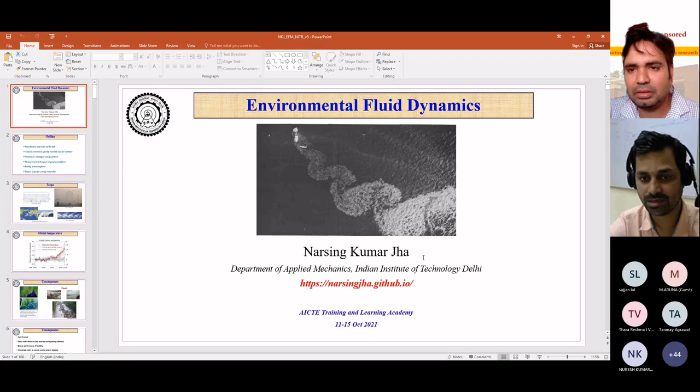Thank you, Professor Kishore, for the nice introduction, and thank you for the invitation to talk about environmental fluid dynamics in this AICTE ATAL Academy. Today I'll be talking about environmental fluid dynamics, and soon we'll see its scientific as well as practical relevance. I'm Narsing Kumar Jha, and as introduced by Professor Kishore, I'm at IIT Delhi.

The outline of my talk is as follows: first, introduction and the scope of today's talk. Then I'll move on to natural convection, gravity currents, and air currents associated with building flows. After that, I'll get into the details of ventilation strategies and guidelines, discussing the importance of ventilation in today's scenario. Then I'll briefly talk about different measurement techniques in geophysical flows, which will be advantageous for many participants to start working in this area.

Then I'll talk about another aspect of geophysical flow, mostly found in oceanic flows, which is bubbly turbulent flow. In between all this, I'll keep talking about future scope for young researchers like you. Please feel free to stop me wherever you have any questions regarding the presentation, the scope of work, or the measurement techniques. This is a very interactive talk, not a research seminar talk. So just stop me wherever you need clarification or have more thoughtful questions.

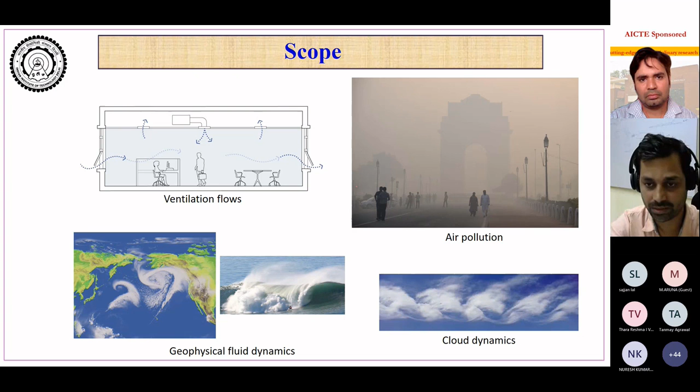And if it doesn't stop, then what happens? The first consequence is that if the temperature rises, glaciers will melt and low-lying lands will start to flood.

Near the coastal area, you will have less land available for occupation or vegetation. And whatever land is occupied, if water is over there, then all the civilization living over there will have to face consequences. And those consequences are very severe, and we don't realize how severe it can be till the time we face it.

So imagine somebody's house is flooded. Where does he go? For rich people, sometimes it's relatively easy, but if it's rural areas, then getting the resource out is not easy. Then what do you do? You live on the roof of your house. And it's not easy, flooded by rain, and the sun is not nice to you, and where do you get the food? The complete land is flooded.

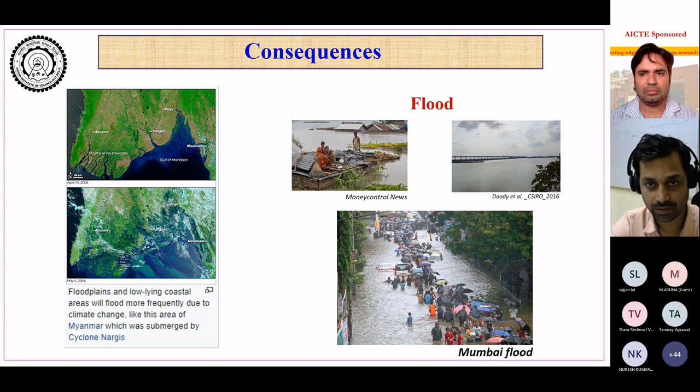Second, as temperature rises, what happens? If temperature rises, then you will have a cold crunch, because now you need cold. How do you create cold? You pay a bill for that, you pay energy price for that. And with energy price again comes the irreversible process of global warming and climate change.

So what is important? We need a policy to stop or minimize the soaring cooling energy demand. Every citizen of the country cannot afford to run their AC at 16 degrees centigrade, because you feel equally comfortable at 26, 27. Try running your AC at 26, 27 - it's very similar to what comfort you get at 16, apart from having a blanket. If it's summer, you don't need a blanket. You can run your AC at 27. And then policy is needed for that.

There has to be some intervention from the policy side. Some of these guidelines are suggested by the International Energy Agency from 2017, understanding some of these situations of world energy consumption in buildings, and seeing how it's rising continuously.

So first we need policy, but at the same time we need better energy efficient buildings. That's where a fluid dynamics researcher like us will play a role. We need to understand and optimize the energy performance of the building.

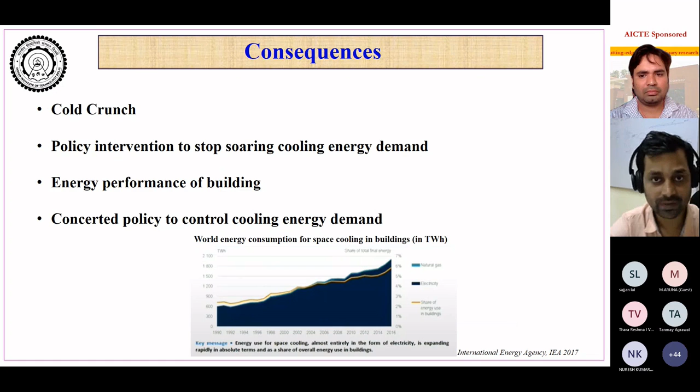And another big problem apart from climate change is air pollution. So that is the next area where I see that one day a Nobel Prize will be awarded. And a country like India, which is facing a huge problem with air pollution, has large scope to work in this area.

So that's the positive consequence. Now let's see how much energy we invest in buildings compared to transportation and industry. If we see metric tons of carbon released from different sectors, transportation is almost half that of buildings, and industry is half that of transportation.

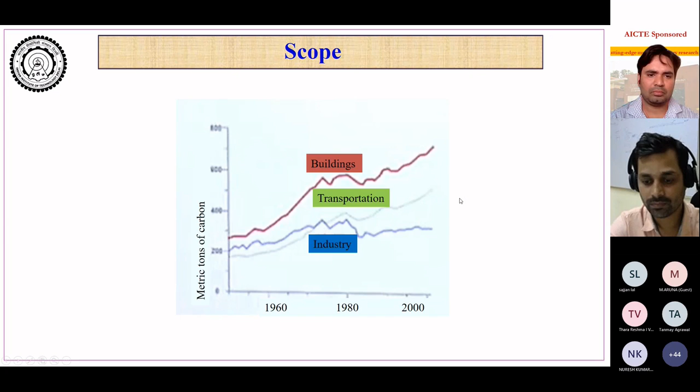So a lot of energy is spent, or a lot of carbon is being emitted from here. We need to take care of this, understand it, and optimize it, as I was telling earlier. So now, how do we optimize this? How do we reduce this carbon? Where does the energy come from?

We have to use readily available sources rather than depending on fossil fuels like coal and all. I'd like to remind participants that it took a billion years to create these fossil fuels, and we, the human civilization, have almost emptied it in less than 300 years. With an optimistic evaluation, in the next 75 years we'll run out of fossil fuel. So we need to depend on other sources of energy which are readily available to all of us without any disparity by the system or nature.

One obviously is wind, because of the pressure distribution between coastal places and the mainland. So wind is freely available to us, sun is freely available to us, and then we need to optimize it. If the sun gives us heat, gives us summer and increased temperature, it also gives us enormous opportunity to extract energy from it and fulfill some of our needs.

Now let's look at buildings, as I was talking about. Let's look at the first air-conditioned building, built almost 150 years ago. That's the Larkin Building in Buffalo, New York. You see this building used to have thick concrete walls and a lot of windows.

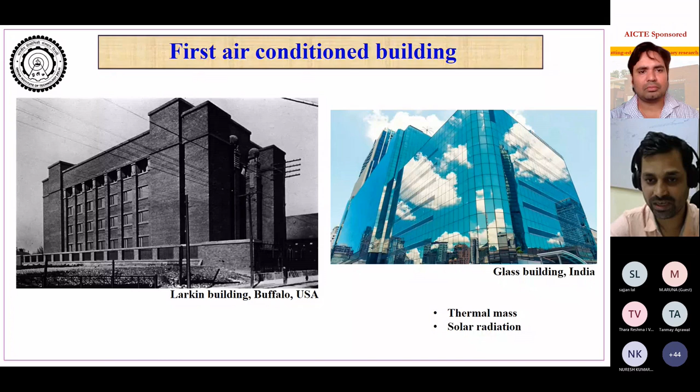So now let's specifically look into building flows. If we look at some classical fluid dynamics problems, say flow behind a sphere, most of the dynamics is governed by the boundary conditions or the geometry of the sphere. Or if we look at meteorology, boundary conditions almost become irrelevant, and most of it is internal dynamics resulting from the bigger boundary conditions posed by nature or energy.

Now in buildings, you have both - a strong internal dynamics inside the buildings, and outside, because the building is placed in the atmosphere. And then you have a huge geometry effect also. So this becomes more complicated than any classical fluid dynamics problem, or even meteorological problems, which you'd think are really tough. So building flow is probably tougher than both, because it's a combination of both.

And it's not a linear combination. The Navier-Stokes equations are such that they don't allow linear behavior in most places, and things interact non-linearly. So some say it's tougher than rocket science, or the toughest problem humankind has ever faced in fluid dynamics.

Okay, so then we need to work on it, because I showed you in my previous slides that there is a lot of repercussion and reaction on how we respond to our system. So now let's look at building flows specifically.

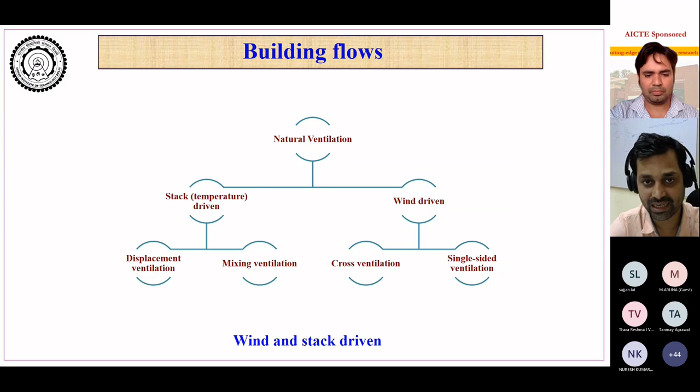Now I'll come to other aspects of ventilation. Why do we need ventilation? Say there is a human sitting here, and we roughly release 100 watts, that is 100 joules per second, as heat. That's like, in current day scenario, if you take a 50 watt bulb, so 2 bulbs you are burning every time on your body. No wonder humans are lighting.

And roughly you need 10 liters per second of airflow to remove the carbon dioxide which you are releasing in the room. So imagine if this room is closed and full of carbon dioxide, you will feel suffocated because of that. It has been shown that higher levels of carbon dioxide also affect your productivity and human behavior. So you need this airflow not only for comfort, but to flush out the carbon dioxide you release wherever you are living.

So ventilation is needed for that, to get in fresh air and release the carbon dioxide also. Even if you feel comfortable, running the air conditioner in circulation mode is not good when you are sleeping at night, because your room will be filled with carbon dioxide. So you need to open your windows at some frequent time interval to make sure you have enough fresh air, so CO2 is diluted such that it's healthy and breathable.

So with that, I'll show you how 100 watt bulbs exist around us. See the airflow around a human body. This is a typical human, so let's look at the flow pattern around it. This has been visualized by color schlieren imaging. This is when a human is static. Soon I'll talk about human wake and other things, but see what you are releasing every time.

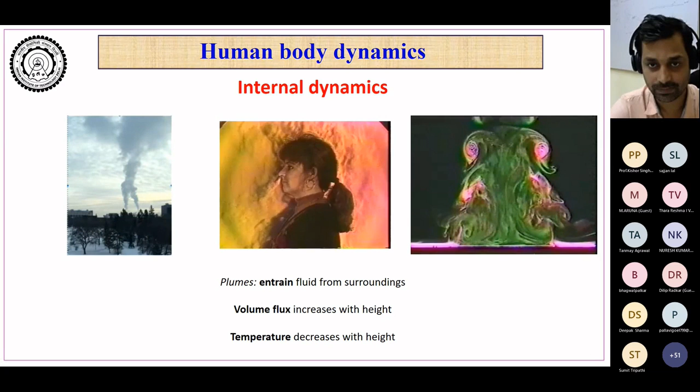So now let's look at the flow. We looked at flow around a human. Now let's look at flow in a building. Then we'll try to couple both.

Imagine there is a warm room inside and cold air outside, which is the condition in winter, coming very soon. Now if you open a door, some hot fluid is going to come out and cold fluid is going to go in. These are the hot fluids, this is the cold fluid that has gone in. This movement is called a gravity current, because the flow has been set up by gravity due to density difference. We'll talk more about that.

Now you see some of the energy you put in to warm your room is being lost when you open the door. This is a very typical scenario in cold winters. How do we minimize this? How do we stop it? First we understand how this mixing takes place, then we try to understand how to stop it. This is work I've been doing with my students, and some of what I'll show you is from one of my students.

The first point is that there is a density difference across the doorway. The moment there is mixing, there is not only loss of heat but also ingress of moisture, dust, pollutants, bacteria, flies. In Indian climate, if you've cleaned your room with an air filter, the moment you open the door, unfiltered air comes into your room, so you get extra pollutant in your building. So you have loss of energy and loss of air quality. The volume flux, important for energy and air quality, is given by one-third times the discharge coefficient multiplied by the open area times the square root of G prime. G prime is the reduced gravity, which depends on the density difference. This is basically called the orifice equation in fluid dynamics.

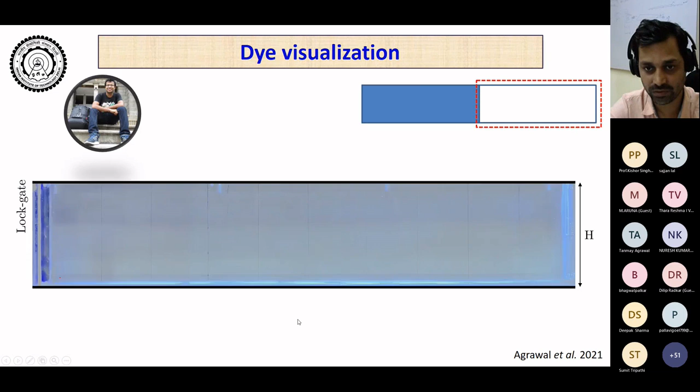Now I'll move to the next slide where laser-induced fluorescence has been used. Obviously there we had a bigger field of view, here we have a small field of view, but let's look at it. Again, gravity current is coming from left to right along the bottom, and you can see very nice eddies setting up here.

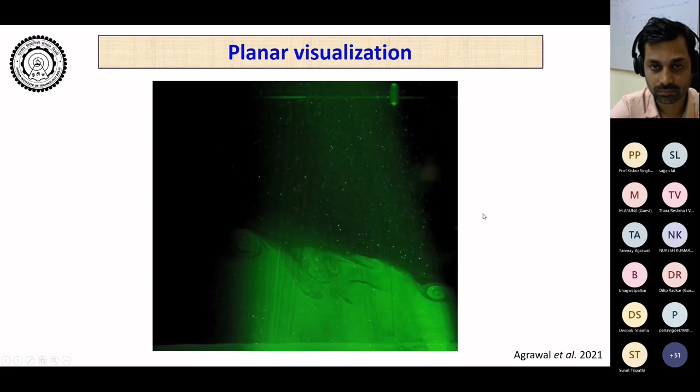So those were the experiments. Now let's look at some simulation Tanmay has been doing recently—again two different density fluids, with conditions given here. G prime is roughly 59 millimeters per second squared. These are some grid independence studies. Let's look at the temperature contour for two temperature differences and how they work. Here it's a 2D simulation, so you can see a very nice Kelvin-Helmholtz instability setting up and breaking into higher nonlinear instability of those eddies. Looking at turbulent dissipation, which represents total loss of energy, you can see wherever there is an eddy, there is a strong turbulent dissipation setting up there.

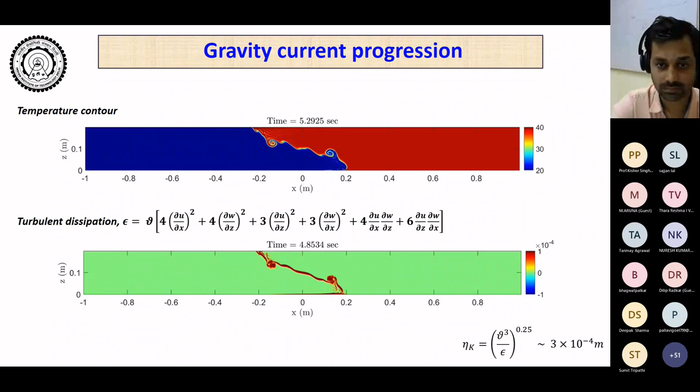So that was the building flow when the gate is opened. Now once we open the gate, I was telling you that we have loss of energy and loss of air quality. So what can we do with that? Let's have a look at another interesting fluid dynamics solution for this.

So now we have one air barrier over here. We blow the air from top to bottom. This air, because of the momentum flux, is going to behave as a barrier because it won't let these two fluids mix. So this is an artificial fluid barrier which we put over there. The advantage with this barrier is even though the door has to be open for passage of human and vehicle, with this barrier human and vehicle can pass easily, but these fluids can't pass. So these are like barriers for fluids, not for humans or vehicles. This is very good.

It has very good utilization in hospitals also, because in hospitals a lot of times you don't want... imagine there is a COVID patient here, and you don't want any of the viruses to go out, but the door has to be opened for doctors and nurses or healthcare workers to get in. So with this, doors are open, but there is no mixing of fluids between inside and outside. And in this COVID, you must have heard that in hospitals there were a lot of serious COVID cases, and transmission was relatively much higher in hospitals.

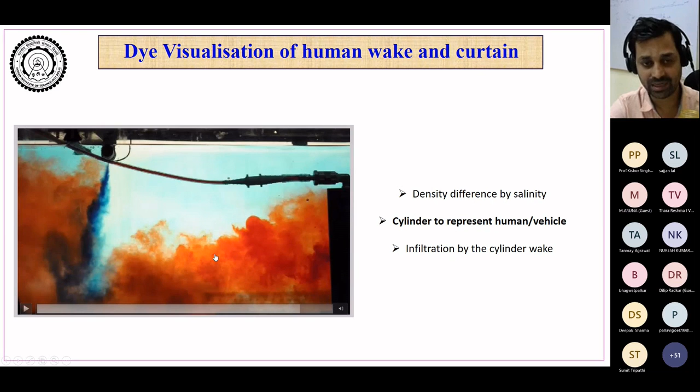Now a cylinder is coming from here with red color fluid in the wake to distinguish it. This jet is broken, and now you see the jet is re-establishing with a wake behind it which has been carried. This extra wake reduces the effectiveness of the air curtain, and we are interested in that—because of the presence of a human, how much effectiveness has been reduced, or for example in a hospital, how much extra exchange of contaminant has taken place, which may be a carrier of virus.

So now this is effectiveness versus deflection modulus. The red symbol is for the base case, just the air curtain, and you can see almost 80% reduction in exchange because of the presence of the air curtain. But now these three are for three different human speeds, non-dimensionalized by the jet speed. As human speed increases, effectiveness starts reducing more and more because of the stronger wake behind the human due to higher velocity.

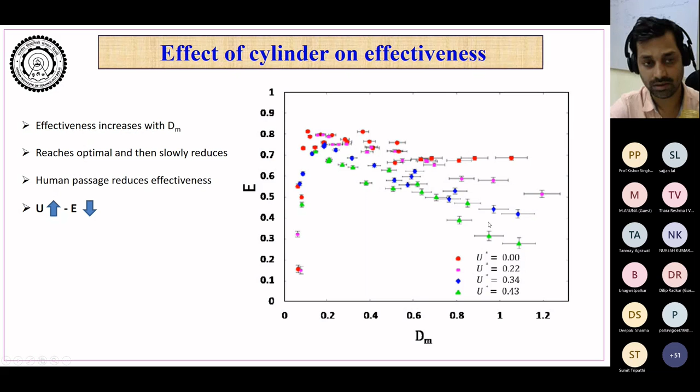Excuse me, I need some water.

So now in hospitals, as I was telling you, the density is the same—contaminated air and fresh air have the same density, but inside you have contaminant. Now when a human or healthcare worker passes, you want to see how much fluid has gone out.

To do that, you take two different fluids of the same density: sugar water outside and salt water inside, mixed such that the density of outside and inside is the same. The advantage with salt water is that it has conductivity, while sugar water has almost no conductivity because of very little charge present in sugar, and salt water has strong conductivity because of large polarity. So if we have a conductivity probe, with known calibration, by calculating the increase in conductivity you can calculate back how much fluid has gone out, and with that you can study the human wake in hospital-like scenarios.

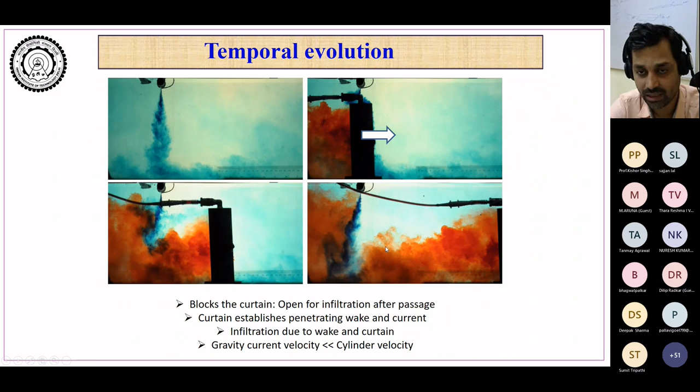These are now for different non-dimensional velocities and different non-dimensional deflection moduli. What you typically notice is that as you increase velocity, here you see very little wake that has come in; here, as velocity increases, it's relatively more, much more, and it's much higher at much higher velocity.

And obviously the typical wake expands—this is the bottom view. So the wake expands in the span-wise plane because of entrainment and exchange with the surrounding fluid due to the eddies present there.

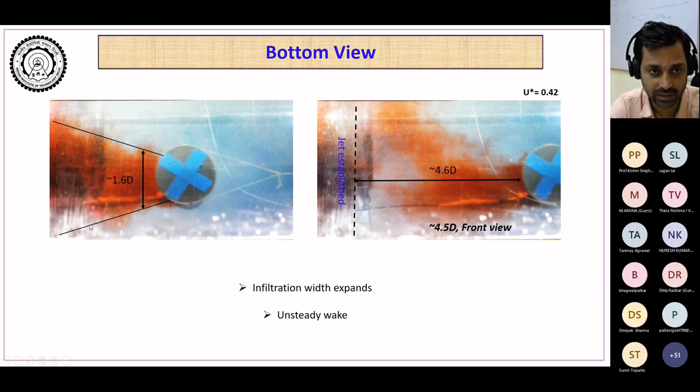And this is the establishment—if we see the establishment of the jet when there is no cylinder or human wake, it takes some time to establish, about 0.45 or so. But with the cylinder, in the presence of the human wake, establishment time increases, and it increases almost linearly with increase in cylinder velocity.

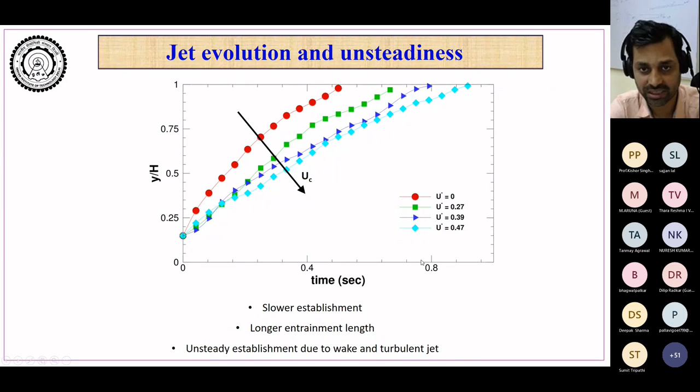Now we'll look at some numerical simulation on air curtain. This is at relatively smaller deflection modulus, so you have this air curtain separating two sides. At higher deflection modulus, they establish it much faster and they are relatively much stronger.

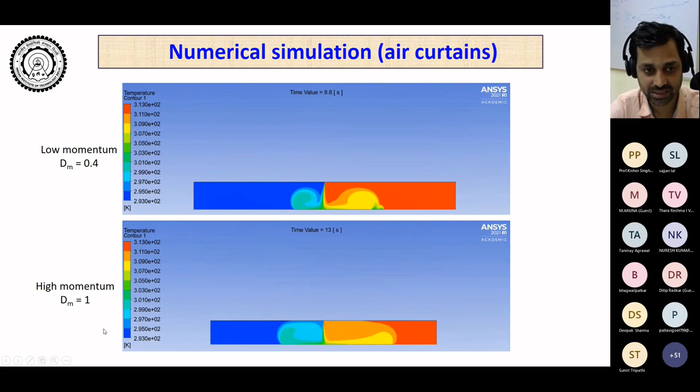Now I have been talking about air curtain in laboratory scenarios. What we did is we installed air curtain in real buildings at University of Delft, and then we did all these measurements over here.

So now we had simulation results, we had lab scale experiment results. Now we did some experiments at real scale and tried to compare all three of them. So now we had laboratory experiments, and we did some real scale installation and real scale simulation over there.

This is the real scale setup which had been installed. We varied this - this is the air curtain which releases an air jet to separate two sides. So this room was at temperature T1, this room was at another temperature T2, and we used air curtain to separate these two temperatures,

these two rooms with different temperature. And we had modeled that at laboratory scale in a water tank, and we tried to compare both of this.

So here now again, we have heat flux because here we have temperature difference. In the laboratory when we simulated, it was due to density difference. So now some heat flux is coming into two rooms, Q1, Q2, Q3 is over here,

and over time some Q4 and Q5 have been added into the rooms during the experiment time. So we ran the experiment for some time T, capital T. In that time, how much heat was added in both rooms, that is Q4 and Q5.

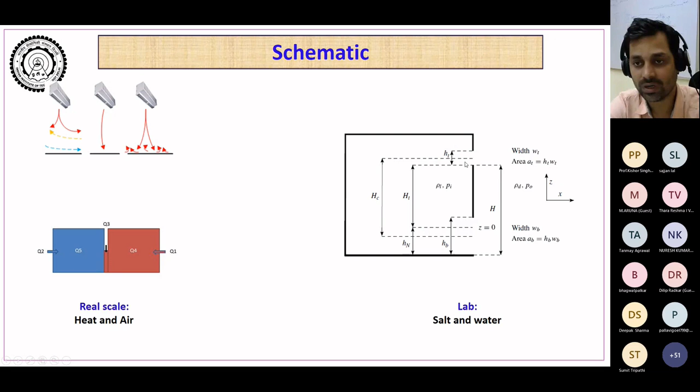And now these are with some openings also. Usually in the rooms I showed you, you just had the curtain and everything else was closed. But in a real room, that's not the case - you will always have some windows and other things for ventilation. So what is the effect of those windows on effectiveness?

Those were studied over here. One thing to note, as you increase the openings, the neutral level changes because of that. That has a huge effect on effectiveness.

Then also some experiments were done, and that's in dimensional way. Then we non-dimensionalized over here with neutral heights. Then all the data seems to scale like it has scaled for lab scale measurements.

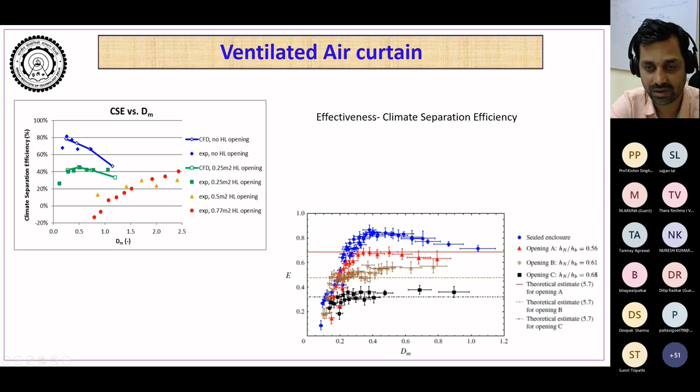And again, we did some simulation there with ventilation - the previous result which I showed you was without ventilation. And then these are the simulations with ventilation, and the flow structures of the simulation and experiments were relatively similar. So the breakdown of curtain, establishment of curtain, and deflection modulus - those were very similar.

And then also some experiments were done with heated air curtain, because imagine a cold climate - your inside room is heated at some temperature and outside is cold. You cannot take cold fluid and blow it on a human, because then they won't feel comfortable. You have to heat it.

But the moment you heat the curtain, there is some buoyancy upward, and that is going to negate the momentum flux which you used to push your curtain inside. So we studied the effect of that. I won't go into the nitty-gritty details of it, but we had some lab scale experiments and some CFD results for that.

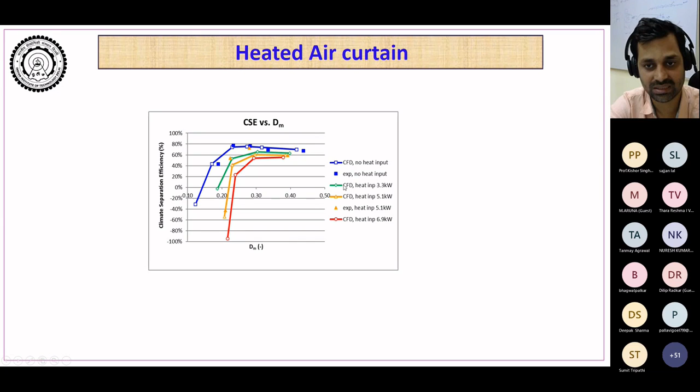So basically what I tried to convey here is, first I tried to explain some basic building flows like gravity currents and other things, and looked into some experiments and simulation results to see how flow takes place. Then we came up with, if we put an air curtain separation barrier between two environments, how well can we separate these two such that energy loss is minimal and air quality is maintained.

So that's first. Second, with the use of that, we also talked about the application of air curtain in hospital rooms in COVID-like scenarios, and we saw that there is reduction in contaminant transport by about 50%.

Then I showed the PIV structure, which is an interesting problem because you have a jet, which is one canonical flow problem. You had human wake, which is a second good canonical problem. And third, the flow due to density difference. When we combined all three, there was a complicated interaction of wake, curtain jet, and gravity current, and we tried to study that and its implication for real world problems.

Now let's look at another problem, ventilation protocol. As I was telling you, ventilation is important for maintaining good health, or minimal required CO2 level, as well as how we use it for minimal energy demand.

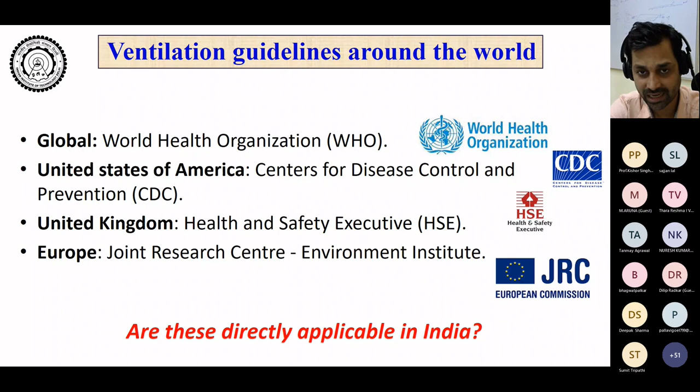Let's look at some typical scenarios which our country has compared to most of the Western world. Obviously, one is the peak temperature over here is very high. Second is varying climate - the ventilation guidelines for summer are not directly applicable in winter, so you have different guidelines for that. A lot of ventilation guidelines from the West, which is mostly cold climate, cannot be directly applied here, and we also have humid climate, so there are various climates to consider.

Warm, humid, hot, dry—and there's a combination of all four. Warm and humid, warm and dry. Cold and dry, cold and humid.

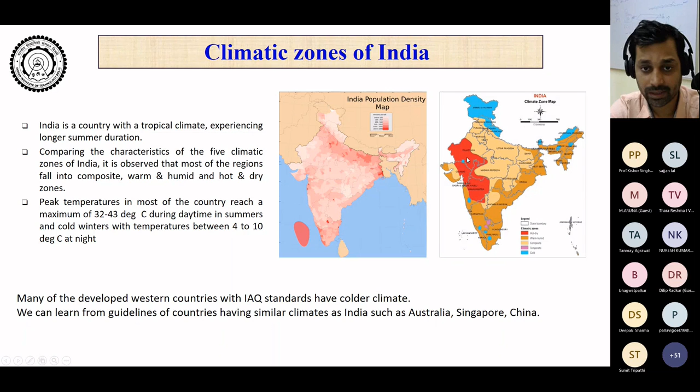So then how do we come up with ventilation guidelines when we have multiple climates? And not only multiple climates, we have huge air pollution. The air pollution level in India is way higher than a lot of other countries.

So I was telling you, if you open the window when air pollution is very high, a lot of bad air is going to go in. So the filter you have put in has to do way more work now. So then how do we couple these two? That becomes a complicated problem, and building flow is way more complicated than rocket science, so coupling these with building flow is a tough task.

So the major challenges in direct implementation of these things: outdoor pollution is very high, we have multiple climates, and most of the buildings in our country are still naturally ventilated—air conditioning hasn't penetrated too much yet.

Also the building space—in our country, as population density is relatively high, a lot of buildings are stacked one after the other, so they don't have enough space even for ventilation. Your window is touching somebody else's wall, so if you open the window there's no meaning, because from where will wind come in? You need some space for wind to flow in. So this becomes a tricky situation, and we need to work on that.

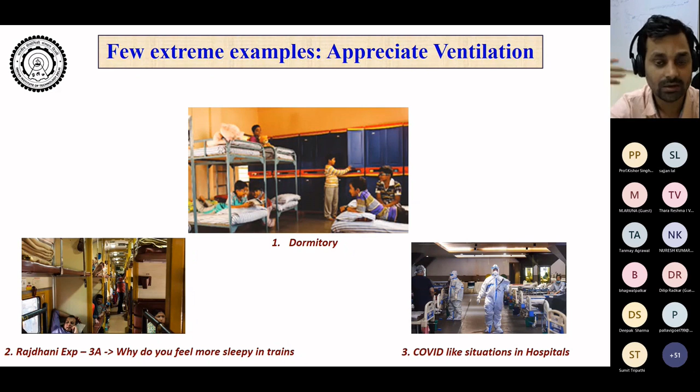So occupancy level, air pollution, climate, and building construction are the four major complications we have in our country, and young scientists like all the participants need to participate to understand our problem and come up with solutions.

Then you have various building types—schools, hospitals, office space, residential areas. All of them have different occupancy levels and different requirements, so ventilation has to be designed based on the implementation area also.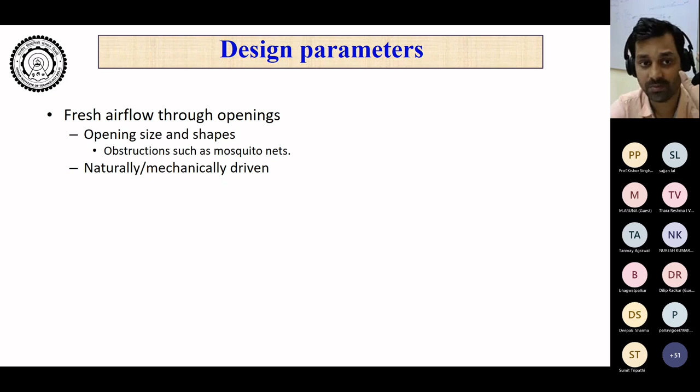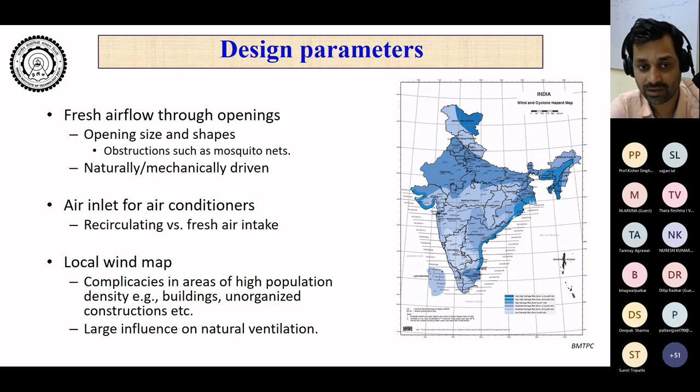So basically what you want to do is get in fresh air, and make sure that air is relatively clean. So now the concept comes of blue outdoor and green indoor—green means clean air, blue means dirty air. So even though your outdoor is dirty, how can you have clean indoor? Because 95% of the time we spend inside, so how can we have clean indoor? That's the humongous task we have been working on broadly in this area.

Now, when we say ventilation guideline, it's about ventilation rate, which is some coefficient multiplied by area multiplied by wind velocity or the driving velocity. If it's a stack, then it's stack velocity, or if it's mechanical ventilation, then there will be the velocity induced by mechanical ventilation. So this can either be wind velocity, a stack velocity, or velocity induced by mechanical installations.

So how can fluid dynamicists help? As this is a fluid dynamics conference, I'll talk about what fluid dynamicists can do. We can do full-scale experimentation with actual design parameters to optimize what the actual optimal parameters are.

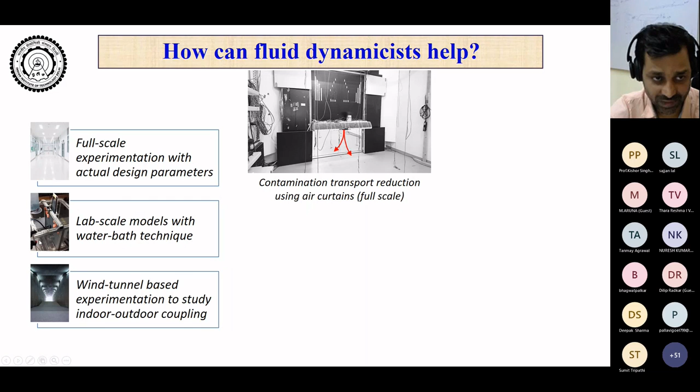If any of you have doubts about some of this experimentation, you can get in direct touch with me if you want to start some experiments. I can help you with lab scale models. How can we simulate real scale situations in lab scale? A 3-meter room can be simulated in lab with a 20 centimeter tank. That's one point to keep in mind, and that reduces a lot of your experimental complications.

And then to simulate wind and other things, we can do wind tunnel experiments. All that comes from the experimental side, and these three are broad things. Then there are possible pathways. I only talked about experiments, but then there is numerical simulation, reduced order modeling, and field experiments.

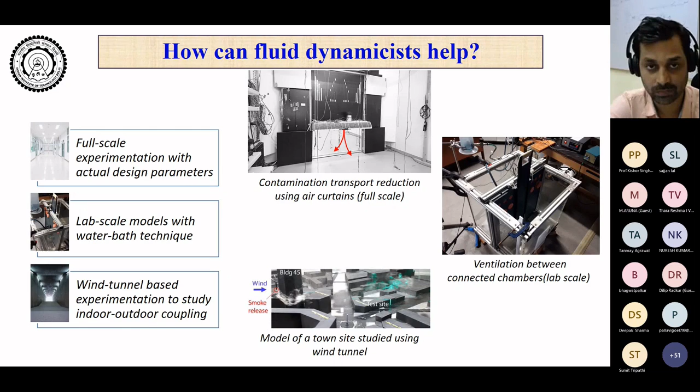Once we do all that and understand ventilation and building flows, we can have recommendations. And with those understandings, if recommendations are in place, we can approach a sustainable world, which is very important in today's scenario. Sustainability is another big area. So air pollution and sustainability are two big areas in fluid dynamics which I see will play a big role in human civilization, not only from a fundamental understanding.

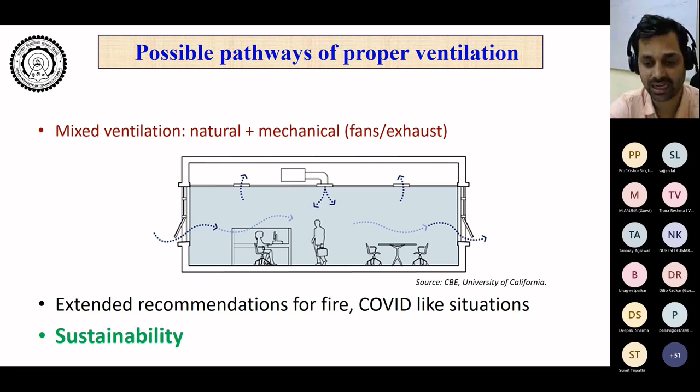So now, how do we set the ventilation guidelines if one has to set it? First we need to understand the current ventilation guidelines. Then we get into indoor air quality guidelines. Once we understand indoor air quality guidelines and ventilation guidelines, we also have to understand outdoor air pollution, which is still not well studied and well understood. Once we understand this outdoor and indoor, then one can come up with ventilation guidelines for indoor spaces.

There have been a lot of studies in Delhi by some of our fellow researchers which have shown that air pollution inside the building is higher than outside. We are trying to reduce the air pollution inside because we spend 95% of our time inside. But with real scale measurement, it has been seen that our inside air is way more polluted than outside. As that's the case, we need to really work on it.

Once we understand it, we can also implement some COVID-like situations, that if there is some spread of disease, or at least in hospitals, say even not in buildings. If there is some infectious patient in a hospital, how do we ventilate over there? So what we basically need to consider is air pollution, infection control, climate change, indoor air quality, along with environmental health and wellness. All these things at the end of the day are done for the health of the environment and wellness of humans.

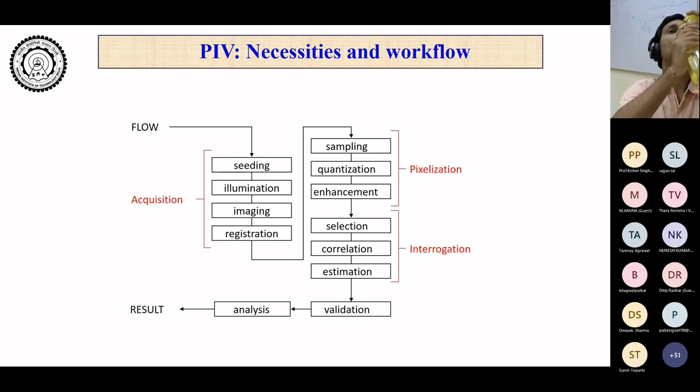So once those particles are illuminated, you need to image them, so you need a camera for visualization. Then there is image acquisition or registration. Once that part is done, you take those images for image improvement, like you sample the image, quantize them, and enhance the quality.

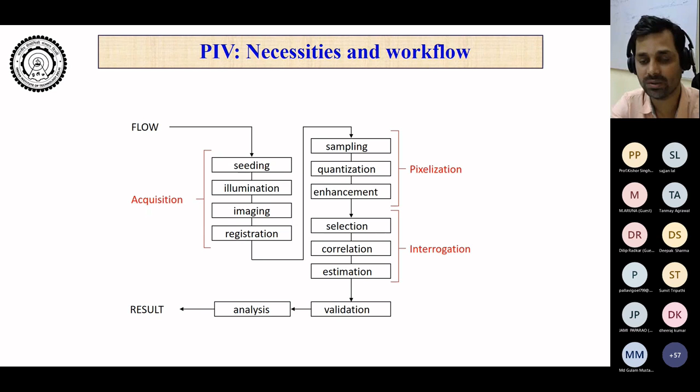Once that pixelization is done, you need to do interrogation. So you select the interrogation area, do correlation, and get the estimated location of the moved particles. Then you do validation again, go back to analysis, and once you go through enough iterations and reach the right accuracy, you get those results and look into the flow field.

Delta t you know from your hardware setting. Delta x, delta y you know from correlation. And once you know delta x, delta y, and delta t, you assume that at such small delta t, the motion is linear, so it's just delta x by delta t. You assume that the particle in that small time has moved linearly from location A to location B.

There are open source software for this like PIV Lab and OpenPIV, so you need not even build these softwares yourself. Technically, one can start doing PIV just by getting a camera, buying one halogen lamp, using some open source PIV software, and start getting the flow field around the area of interest on which you are working. Sometimes it can be as simple as this.

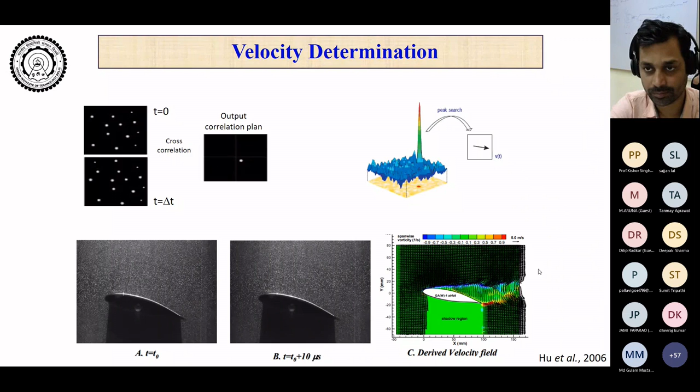So that was the PIV behind an airfoil. PIV can also be used for environmental flow. But the moment you want to do PIV for environmental flow, your area becomes very large because flow structures are typically large.

So imagine you want to do PIV in 1 meter by 1 meter. Then obviously your halogen light source won't work. You need a high power light source, something like 200 millijoule per pulse laser for 1 meter by 1 meter. But those are available in the market, so by research grant one can get money and buy those lasers, then you can do PIV in environmental flows with such vast area.

So here you need a huge, powerful laser, and you need a high resolution camera. If your area of interest is small, you can work with say 1 megapixel. But if you want to do 2 meter by 2 meter, you need a 10 or 20 megapixel camera, so that you have enough resolution at the smallest scale to resolve it.

Or if you're not interested in the small scale, it's not like simulation where if you don't resolve it, you have a problem because your physics won't be right. That problem you don't have with experiments. Not being able to resolve doesn't mean your physics is wrong. It only means your physics is still right because it's experiments. Your physics is always right, whatever is happening is truth.

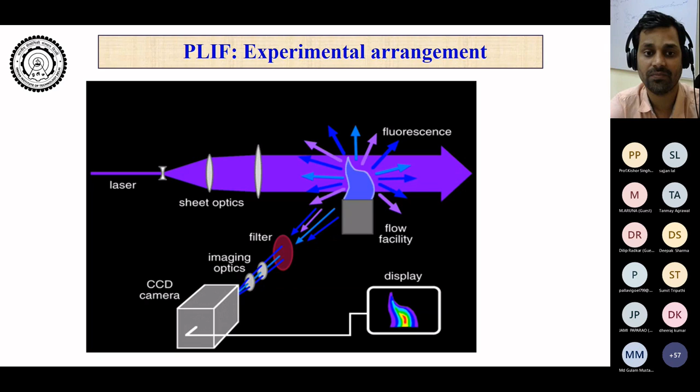So based on your interest, you can choose PIV and LIF. Another easy technique is shadowgraphy. If you have density gradients, most of the time you have refractive index mismatch, and due to the change in refractive index, light rays bend differently, which you can track to find where different density packets are. With this you can study two different density fluids mixing, and study gravity currents with shadowgraphy. This has been done by Frank and Linden in 2014.

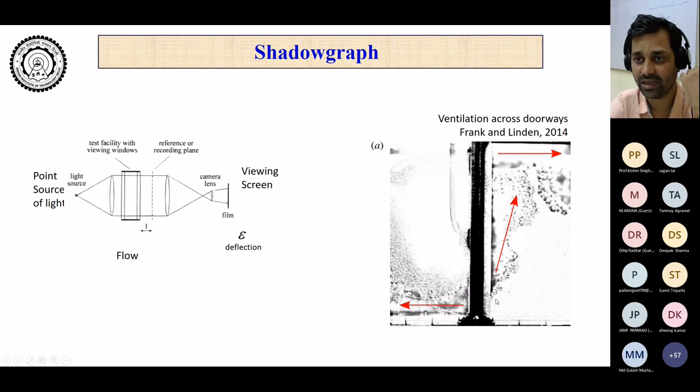Okay, so these were the building flows and stratified flows, their measurements. Now I'll go to geophysical flows, mostly towards oceanic flows, and mostly I'll talk about bubbly turbulent flow. Till now we were mostly focusing on flow in air. Now for oceanic flows, there is flow in water, and you have some entrapped air. How do they respond? Now we are going to study that.

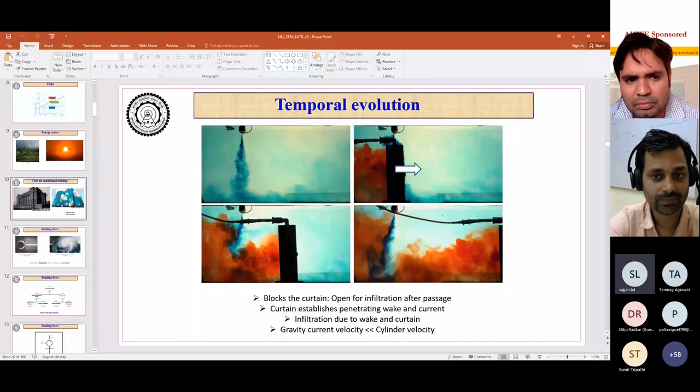So some buildings like this have a building maintenance system, with air conditioning and other things. What they do is have a fresh air intake. Say every 1 hour they will refill 10 meter cube. So 10 meter cube of air from the room they will take out and throw away, and 10 meter cube of fresh air from the atmosphere they will take in through a filter and add into the room.

That 10 meter cube amount is decided by the ventilation guidelines I was telling you about, based on how many occupants are sitting there, and based on those occupants, how much you want to replenish while maintaining temperature and other things. Based on those conditions, the amount of ventilation is decided, and that much fresh air has to be taken in. Is that clear? Does that answer your question? Yes sir, thank you very much. Thanks for the nice question. That's one important aspect, that we have to keep adding fresh air.

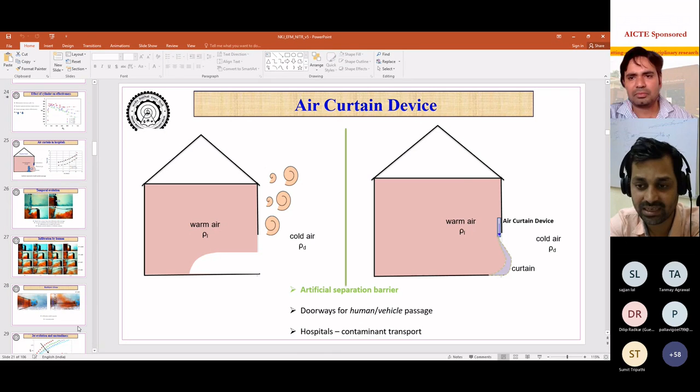So will you comment on that? There is a non-dimensional density difference, right? G prime, G delta rho by rho. So till the time that is matched, the gravity current does not see a difference, because it's mixing on both sides.

Either rho I or rho D, it doesn't matter which side, because those are open. So as long as the size of both sides is symmetric, the gravity current dynamics depends on the non-dimensional G prime, delta rho by rho, because rho is the absolute density, which is important, and delta rho is the density difference.

But as rho itself changes, because if temperature is very high, then even if delta rho is the same, if rho changes, your dynamics will change, because the net gravity changed, and that will play a role. So one has to see the same G prime. If G delta rho by rho is the same, it will obviously be different from Western countries, because the absolute rho will be different in cold climates versus hot climates.

Because the mean temperature in UK— the outside temperature, inside temperature— you usually maintain inside at 20, outside says 10 or 5, something like that. Over here, in hot climates, the outside is 45, inside says 30. So the absolute density changed, and based on that, your gravity current dynamics will change.

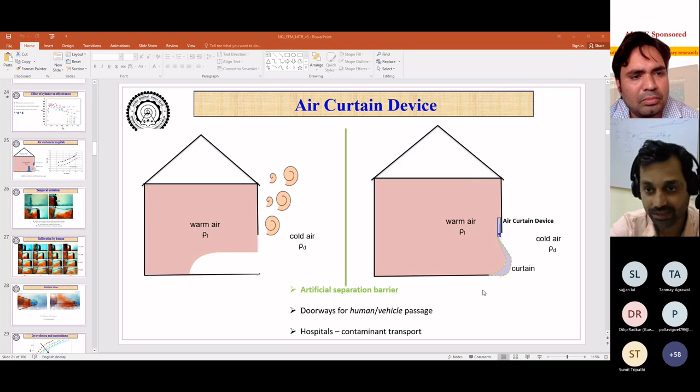No, you are completely right, because it's a measurement, so there is no abnormality in that. But what we want is, even if our outdoor is polluted, we want our indoors to be clean. In that sense, our indoor is more polluted than outdoor. So it's not about abnormality, it's about being cautious such that we keep our indoor clean. That's a problem to work on - how can we keep it clean inside. There is no problem with measurement, there is no abnormality with anything. It's just undesirable, not a preferred situation to have.

Okay sir, so we need to set up flow in our room in such a way that our indoor air quality is better than outdoor. Understood, sir. So, any other questions, participants? If not, let's discuss the next topic. Dr. Narsingh, I think we can go ahead with the next.

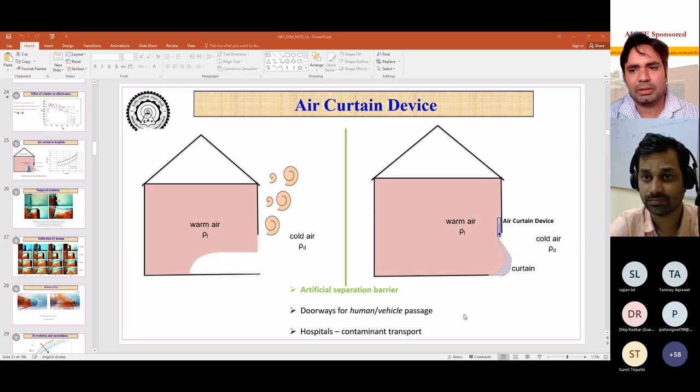So now the next topic is bubbly turbulent flow, which has motivation from geophysical flows. Bubbly turbulent flow you might find around ship propellers, where you have cavitation and bubbles, or it entrains bubbles from the free surface, or breaking waves near the shore - you must have seen all of this. This plays a huge role in mixing and other things, because bubbles induce strong velocity which helps in mixing. Bubbly turbulent flow is also used for drag reduction in ships and submarines.

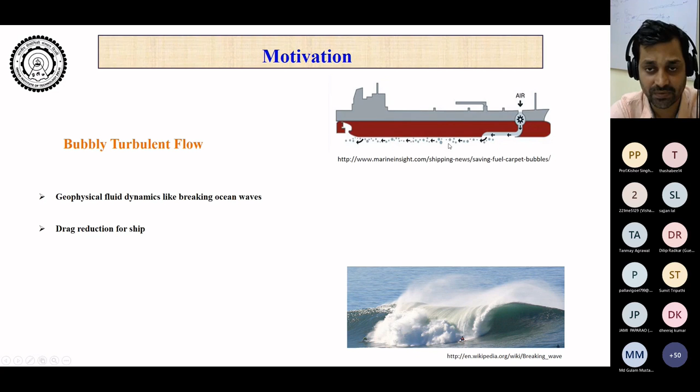So basically in bubbly turbulent flow, when you put bubbles in turbulent flow, because of the presence of the second phase, they modify density and viscosity, but this is not very strong at low void fraction. What is seen is that the presence of these bubbles strongly modifies the vortical structure. Vortical structures are the building blocks of turbulence. And if vortical structures present in the turbulent flow are affected, that will affect wall drag, mass, momentum, and energy transfer in turbulent flows. With those motivations, we want to study the interaction of bubbles with these vortical structures in turbulent flow, and later relate that to mass, momentum, and energy transfer.

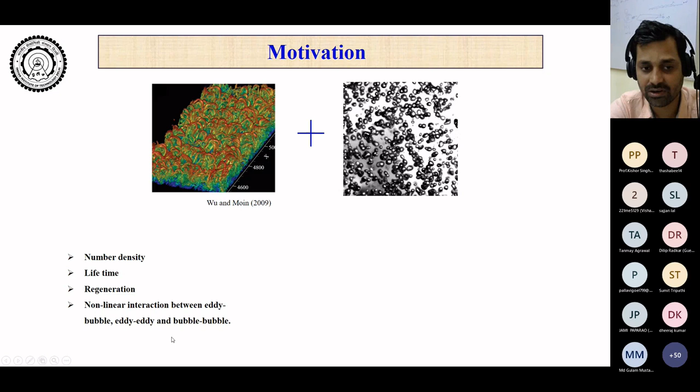So now if you look at vortical structures in turbulent flows, this is a study by Wu and Moin. This is just a plain turbulent boundary layer, single phase. You see a lot of hairpin kind of structures here. These hairpins have very high number density, but number density is one thing. Second, they have a lifetime - they are generated, then they die, and before their death they regenerate new structures. So there is a life cycle associated with these structures, and these structures interact nonlinearly among themselves, as one can expect, being the Navier-Stokes nonlinear. You have eddy-eddy interaction, which is nonlinear, eddy-bubble interaction, which is nonlinear, and bubble-bubble interaction. So if you put multiple bubbles in turbulence, it becomes a really complicated fluid dynamics problem because of these complications of regeneration and nonlinear interactions of eddy, bubble, and bubble.

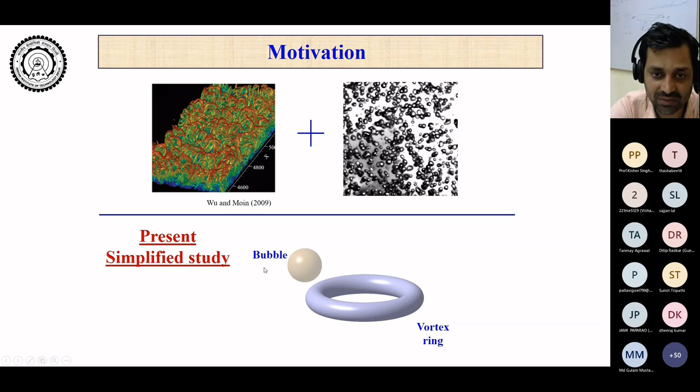Now to simplify this problem, we had three issues: high number density of bubbles, high number density of structures, and lifetime. So to simplify, rather than multiple structures, take one single vortical structure, say a vortex ring. Take one bubble rather than multiple bubbles. So one vortical structure - vortex ring, one bubble, and lifetime was the third problem. These vortex rings have a fairly large lifetime compared to the interaction time scale, so during the time of interaction, you can assume their lives are not being affected. With those simplified assumptions, we'll look into the interaction of a vortex ring with a bubble to simplify the bubbly turbulent flow study.

There are some experiments which showed some local fragmentation of the core, but these fragmentations healed as time passed. So there was no permanent deformation of the vortex ring due to presence of bubble at very low void fraction. The void fraction over here is 10 to the power negative 6.

This is a numerical simulation by Revuelta in 2010, where they studied bubble fragmentation due to presence of a vortex ring. They mostly focused on bubble fragmentation.

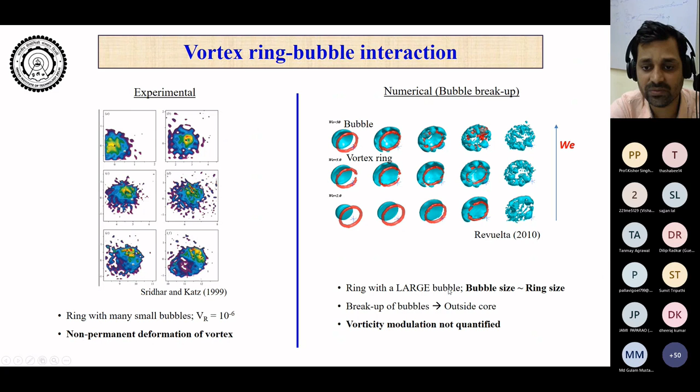What we are interested in is the vortex ring and bubble, looking into both properties of bubble and properties of vortex ring. So we varied the strength of vortex ring, from 30 to 500 centimeters square per second. We also varied the non-dimensional core radius.

Here, one is ring radius, that is capital R, and then there is core radius, which is small r. The ratio of the two is a very important parameter because that will decide whether it's a thin core ring, and whether the two cores are very separated apart or very close. When they come very close, the dynamics changes - instability characteristics and other things.

From the bubble side, we took air bubble with known surface tension of 72 millinewton per meter. Bubble diameter was fixed at 6 millimeter, which gave us a volume ratio of 0.1. If you look at the non-dimensional number, Weber number was varied from 3 to 400 and volume ratio was fixed at 0.1. These numbers were chosen because in practical bubbly turbulent flow, these are the typical numbers you find.

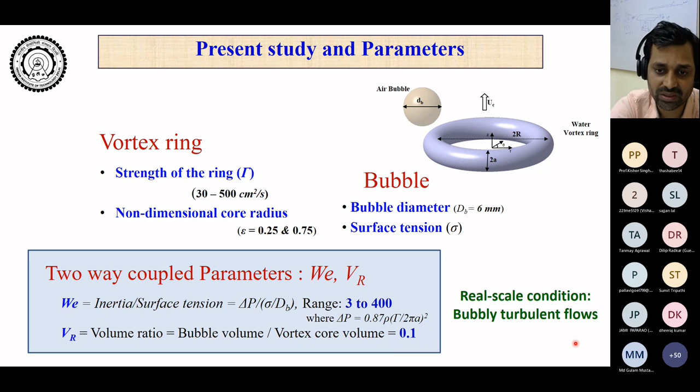So now let's look at vortex ring. This is the typical vortex ring which is formed by a cylinder piston system, and you have two induced velocities like this in the azimuthal direction. This is the top view of the vortex ring.

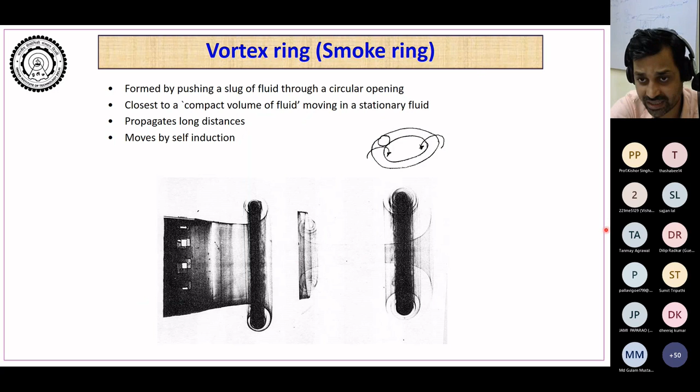This is usually generated by pushing a compact volume of fluid, and due to self-induced velocity it propagates in the streamwise, axial direction. Once these rings form, they become unstable - vortex rings can be laminar, transitional, and turbulent, which I'll show from my study.

First, let's look at when they become unstable - these kind of waves develop at the vortex ring core. If you remember classical instability problems, the first thing you do to check if a flow is unstable is put some waves on it and see the amplification of those waves. If those waves are amplified, the flow is unstable; if those waves don't grow in time, the flow is called stable.

So now let's look at the classical case - you must have studied it, but let's look at the wave and see how they break down when we call these flows unstable.

Now let's look at this video. This vortex ring is tracked by a bubble. Just focus on these circular lines and let's have a look at it. Now you see some waves coming in over here - remember this is a classical instability problem, you put in some wave. So the most unstable waves are coming in over here. Now you can very cleanly see these waves, and once you can see these waves, you will see the breakdown.

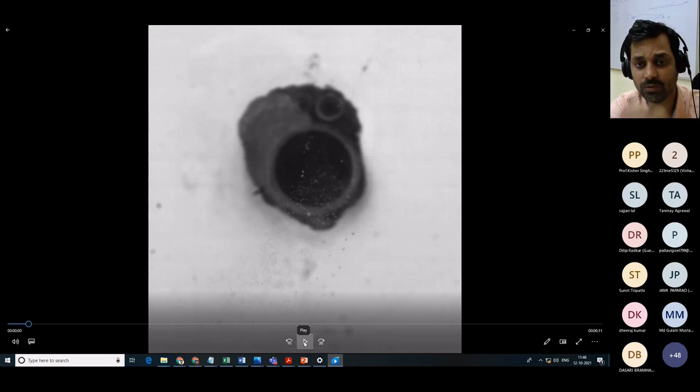Now I'll show you instability of a vortex ring. This is the vortex ring being formed, which is circular in shape. We are tracking the vortex core of the vortex ring. Now you see it's going to be unstable, some wave is going over here. Now you see some very nice waves have grown up. See, there are some kinks also developing at the wave, which is the start of the breakdown. Before the breakdown, they develop the kink, a singularity kind of thing. And now after some point they become turbulent.

I'll just repeat this video. So laminar, and then some waves are developing. These waves develop like classical waves, and then they start breaking down, and they're broken down. This becomes random.

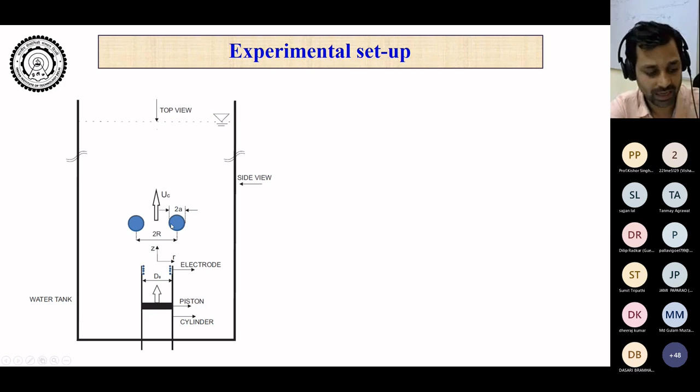So on the vortex ring, that's another interesting thing - you can span the range of laminar to turbulent rings. The vortex ring was generated by a cylinder piston system, and we generated the vortex ring through this. Then there was a place to inject an air bubble, which was injected before the vortex ring. So the bubble is over here, and the vortex ring is going to interact with these bubbles.

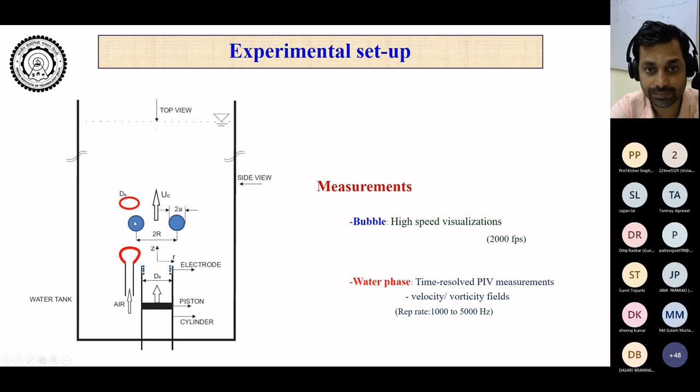Now we'll look at the interaction of vortex ring with bubbles at high Weber number and high Reynolds number. Obviously, volume ratio is fixed, and this is thin core ring. So we will see this is now the front view. Earlier what I showed you of the vortex ring was from the top to show these waves. Now I'll show you the front view to study the interaction.

Let's look at the interaction. You will see the vortex ring, which is tracked by small bubbles, and there are big bubbles left for interaction. So this is the vortex ring over here, and it is interacting with the bubble, and these bubbles are expanding in the azimuthal direction. Then they contract slowly, and then they expand. They contract in the azimuthal direction, then they expand again, and then slowly they start breaking down.

I'll just repeat this. Vortex ring, bubble capture, entrainment, expansion. Then they expand, stay there, and you can see some interface perturbations and other things. And then they contract, and then they expand again.

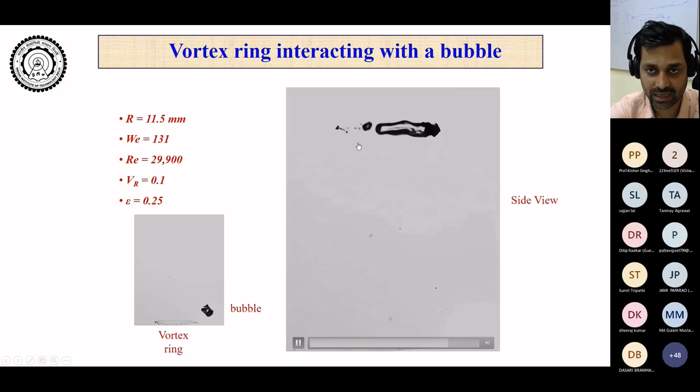Now if you look at the side view, how does it look? This is a vortex ring which has been tracked by micron-sized bubbles, and there are large bubbles left for interaction. These two interact, the bubble is captured in the vortex core, and then they start expanding in the azimuthal direction, like we saw in the video last time. Here you can very clearly see surface waviness also - this is interface perturbation. So bubble breakup and all is also studied from here.

So how do bubbles break up in a vortical flow field, which has relevance to geophysical flows, and then at much later time these bubbles are broken down into smaller pieces.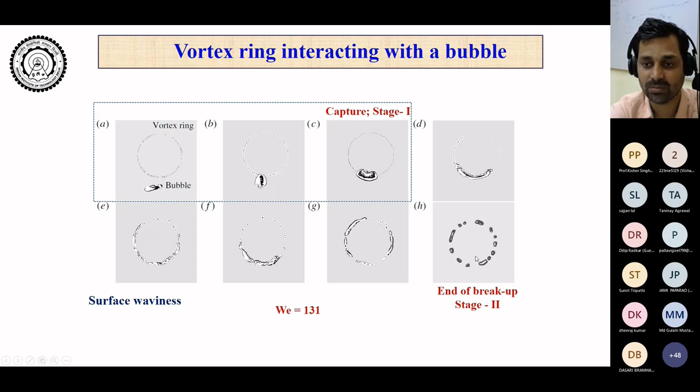Now let's look at vorticity dynamics. What you do is cut this and do planar time-resolved PIV, and what you look at is this blue and red vortex core. So what you see over here is two vortex cores, and they have rotation directions - one is clockwise, another is anti-clockwise, and they are convecting vertically upward.

And this scale is being moved, so you are always in the frame of the vortex and bubble because they are convecting vertically upward. So they are intact before interaction, and see how cleanly this bubble pierces the vortex core. This is liquid phase, this is gas phase - see how gas phase is penetrating the liquid phase and affecting the vortex distribution in the liquid phase. That is one thing which we should note.

And then they go and sit inside the core, and after that they make these cores. Earlier you had Gaussian distribution of vorticity, now here you have annular distribution of vorticity. So now you have two peaks, one peak here and one peak here.

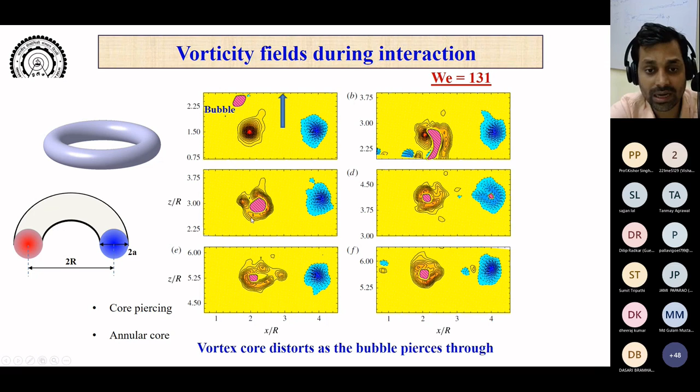This annular core is shown to be more unstable compared to Gaussian core, analytically, as we'll see now.

Before seeing the core instability, let's look at bubble dynamics. These bubbles are captured, and first thing one can look at is capture time. Capture time is balanced by a drag force putting resistance on it, and a capture force due to low pressure at the vortex core trying to capture it. The equilibrium of these two decides the dynamics, and one can get the capture time from here, which we have skipped for now.

After that, we also looked into elongation rate, how this elongation changes with Weber number, which is vortex ring inertia by surface tension.

But now one question to ask is, it was captured in this direction. We know that bubble is captured at the vortex core due to presence of low pressure at vortex core. But why was it expanding in azimuthal direction? What creates the azimuthal asymmetry?

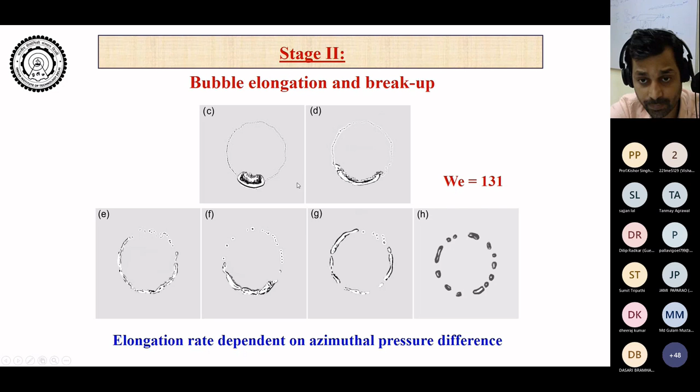To look at that, we started looking at pressure. When bubble is outside, pressure over here is low. We know that due to this low pressure at the vortex core, bubble is sucked in. But then to explain the azimuthal expansion, now you look at azimuthal expansion.

Now bubble is captured inside the vortex core. But the moment bubble is captured inside the vortex core, the pressure field is modified. Pressure over here is almost the same as the pressure outside, but pressure on the other core is still low. So pressure here has almost become atmospheric pressure because of the capture, but over here pressure is still low. Due to that, an azimuthal pressure gradient is set up, and because of that, it expands in azimuthal direction.

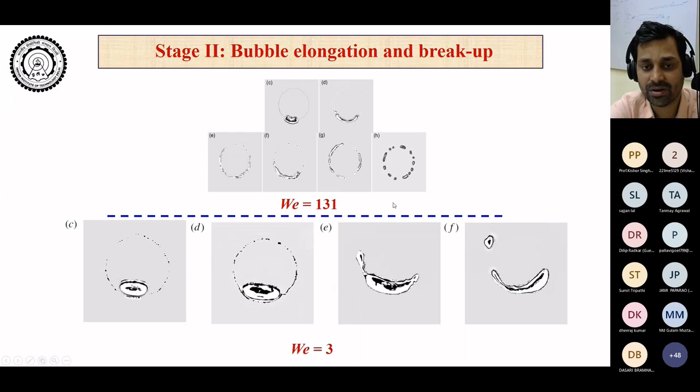Also you see the breakup dynamics. Over here you have roughly 12 bubbles in equilibrium position; here you only have 2 bubbles. So Weber number also affects the maximum azimuthal expansion, it affects the surface waviness, and it also affects the end equilibrium number of broken bubbles in the vortex.

Now, as I showed you, we got the pressure difference based scaling for azimuthal expansion, so if you look with Weber number, you have different expansion rates in azimuthal direction with time. But once you non-dimensionalize time with this pressure difference based time scale, because pressure difference is driving it in azimuthal direction, then you see all the azimuthal expansion collapses to a single line.

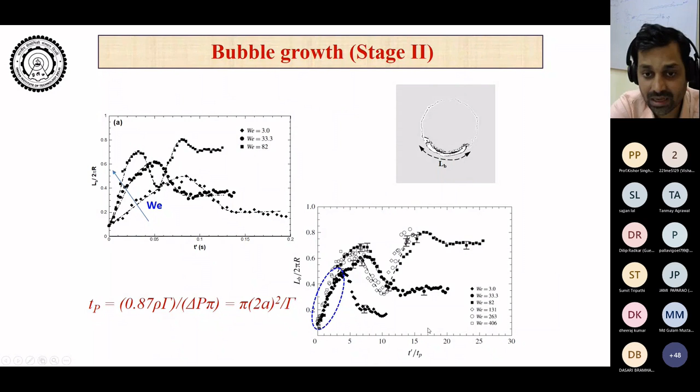Not only expansion collapses, all the compression too - this is compression, right, we saw that it expanded and then it was compressing - all the compression also has similar slope, they also collapse to one line. That's because once you non-dimensionalize the dimensional time with the pressure gradient based time scale, all the data collapses to a single line of expansion and compression.

Another thing to look at is why do bubbles break up. Obviously one thing you remember is this waviness - this wave is called Kelvin wave because it was found by Lord Kelvin, and these Kelvin waves, you see the necking and breakdown taking place due to them.

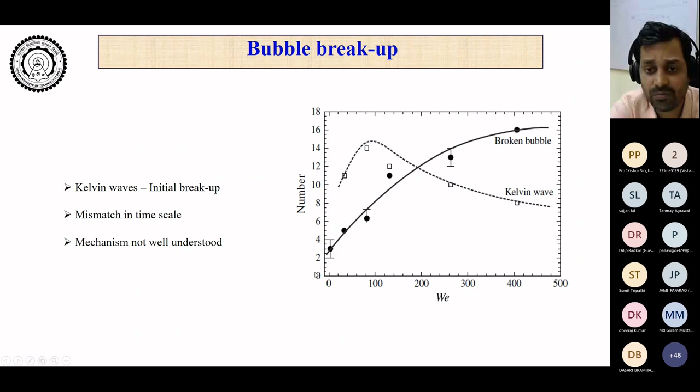But if that's so, the number of broken bubbles should be equal to number of Kelvin waves. If you look at that, this is number of Kelvin waves and this is number of broken bubbles. We saw that initiation of breakup was taking place because of Kelvin waves, but the end number of bubbles is not affected by Kelvin waves. It's decided by something else, which is still a question - what decides this breakup of bubbles in the vortical flow.

Now if we look at vorticity dynamics, which I showed you at large Weber number - I was telling you that once this bubble goes inside, they now have an annular core rather than a Gaussian core.

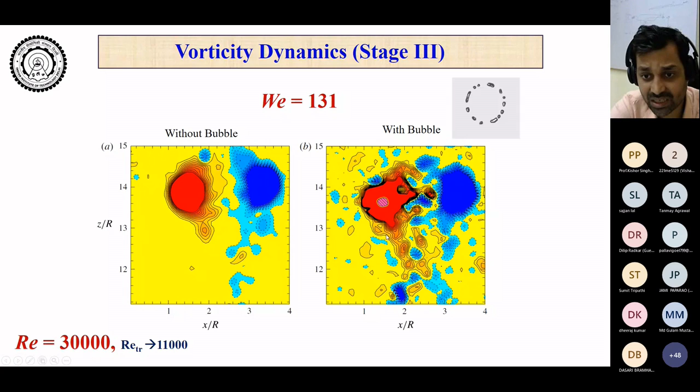So the core here is Gaussian, and the core here becomes annular. This annular core has mathematically been shown to be more unstable. Now you see the shedding behind this core. For the no-bubble case, there is no shedding because this is a laminar ring. But once a bubble is captured, you have strong shedding behind the vortex, and the bubble is sitting over here, so you get a lot of vortices left over. At larger Weber number, these rings are also turbulent in nature because of large ring Reynolds number, so there is some shedding behind the vortex ring due to the turbulent nature of the ring. But once bubbles are captured in, shedding increases a lot because of the presence of the bubble.

Now once we talk about shedding, the question to ask is: vorticity is a local parameter, right? So you look at vorticity, but that is local. What happens to the integral parameter? The integral parameter is enstrophy, defined as the integral of omega squared dV. But since we have 2D planar information, we plot omega squared dA.

So let's look at what happens to enstrophy with time. Initially, when bubble capture is not there, there is some enstrophy, and what happens to it when bubbles are captured inside? Open symbols are for the base case and filled symbols are for the bubble case. Filled circular symbol is for low Weber number, filled square symbol is for high Weber number. We see that at high Weber number, there is a huge reduction in enstrophy, which means that the core is almost fragmented.

Reduction in enstrophy means fragmentation of the core, because circulation is conserved. If you look at circulation here, it is conserved -- there is nothing to kill circulation. So if circulation is conserved and enstrophy has reduced, that basically means your core is fragmented such that net circulation is still there, but since enstrophy is omega squared dV, it will reduce if your Gaussian profile is redistributed from Gaussian to annular.

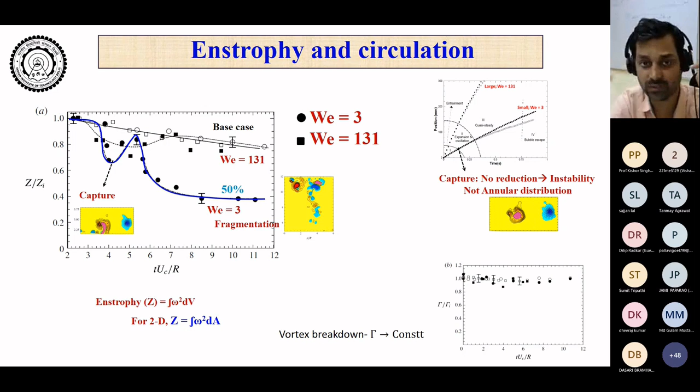Now we look at some thick core rings when rings are very close and inherently unstable, and then you see complete fragmentation of the core because of the presence of the bubble. These are the typical vortical structures you find in turbulent flow fields. In turbulence, the eddies you mostly saw were thick core vortical structures. As they are thick cores, these thick core rings resemble them more, and with that we were able to show -- like in the previous study I showed you -- that in simulations and experiments in bubbly turbulent, real turbulent flow, they had observed suppression at large scale, enhancement at small scale, enstrophy reduction.

And all those things we observed in the idealized vortex ring bubble study. Here also we saw a reduction in enstrophy. Here also we saw that the large scale is broken into smaller scale, meaning there is suppression at large scale and enhancement at small scale.

So those were the idealized studies. Now we do a real study -- we completely do bubbly turbulent flow. So now you take a channel flow, a fully developed turbulent channel flow, now inject bubbles over here and look into different dynamics. We developed a fully developed turbulent channel flow, a bubble injection mechanism, and looked into the fully developed turbulent two-phase channel flow.

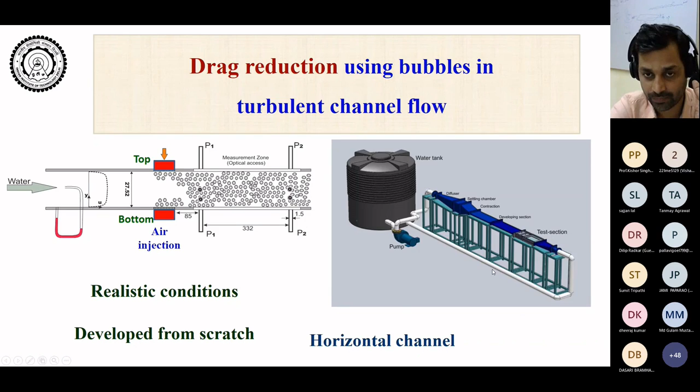What basically we did is we varied a large void fraction range and a large Reynolds number range, which obviously varied the Weber number and other integral parameters. We also changed the gravity. Once you inject from the top, gravity is towards the wall; when you inject from the bottom, gravity is away from the wall; and if you inject from both sides, it's a combination -- gravity towards each side of the wall, acting in different directions.

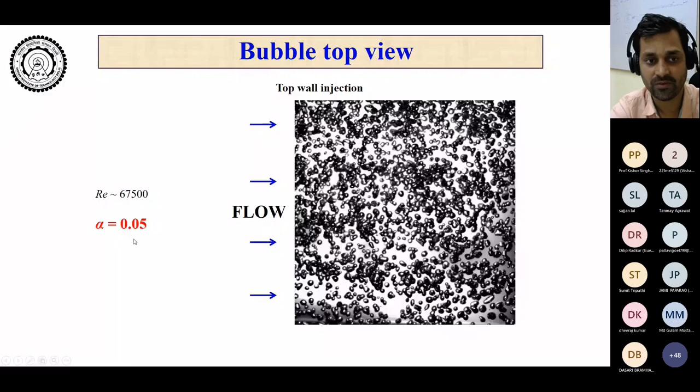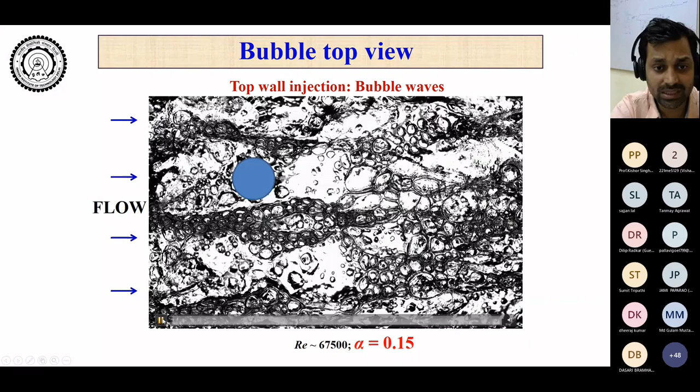With that, we tried to create a regime map for how bubbly turbulent flow occurs for different void fractions and Reynolds numbers, and we had some interesting dynamics. When Reynolds number is large and void fraction is small, you see discrete bubbles going with the flow. When Reynolds number is also large and void fraction is also large, meaning the volume injected is large, then you see these bubble void waves -- air layering, void waves -- and the dynamics of that was studied in detail.

Then we measured the pressure drop, which is a measure of skin friction, to comment on what happens to skin friction in the presence of bubbles. The motivation for that was: can it be used for drag reduction for ships and submarines? So this was funded by the Naval Research Board.

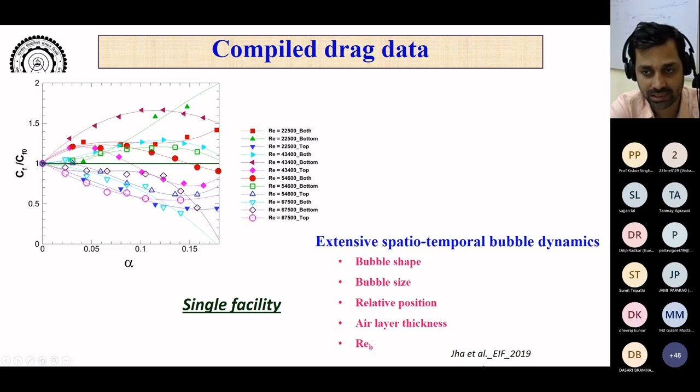So for practical implementation, it will tell them at what Reynolds number and what void fraction this would operate to achieve drag reduction. We varied a large parameter range for different void fraction alpha, different Reynolds number, different gravity orientation, and we saw a huge scatter and related it to bubble dynamics and bubble orientation. This was published in Experiments in Fluids.

So what we observed over here is, from vortex ring, we studied the interaction of vortex ring with a single bubble, and we showed that this is an idealized study of bubbly turbulent flow. We varied the Weber number range from 3 to 400 and void fraction of 0.1, which is typical of bubbly turbulent flow. We studied the bubble dynamics like entrainment into the vortex core, its expansion in azimuthal direction and pressure redistribution, and then breakup dynamics.

And then we looked into vorticity dynamics - what happens to the structure, how it penetrates the core, what happened to enstrophy, what happened at large scale, what happened at small scale - and related all this to bubbly turbulent flow. We showed that it is similar to bubbly turbulent flow in the sense that we also observed breakdown of the structure, reduction in enstrophy, suppression at large scale, and enhancement at small scale. All this was published in JFM, and it was also published in Focus on Fluids, which in every issue JFM selects as one focus article from that issue.

And then we did experiments with full scale bubbly turbulent flow, like two-phase turbulent channel flow, and got the scattered drag plot, related it to bubble distribution, size, shape, position, bubble Reynolds number, and we looked into pressure drop, resistance, and those things.

And obviously, this volume of work is not possible without a good team of people with whom I have worked or had the opportunity to work with. Professor Paul Linden, with whom I worked on environmental flow - he's kind of a founding father in this area. So that lab scale experiment I was talking about, with water and all, he developed those areas in the 1970s. He worked with Turner, who was the founding father for plume theory and other things. And then I also collaborated with postdoc Daria, who was a postdoc with Paul, and we both worked on this ventilation problem.

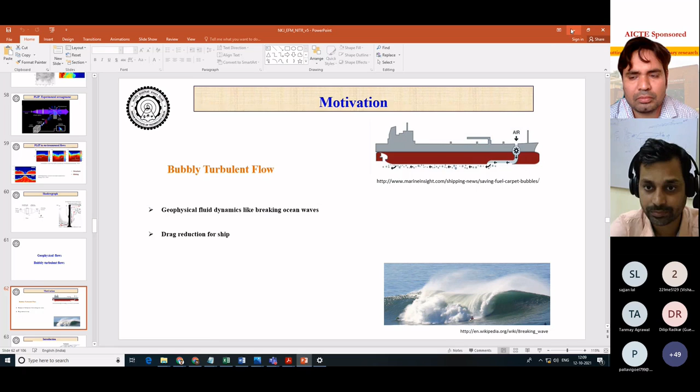And even flow over a ship, it's intentionally been used now - it's called air lubricated ship. They put air bubbles over the hull to reduce the drag of the ship. Today I wanted to focus on environmental flows, so I didn't go towards ship drag reduction and other things, but that's a big area. People use bubbles to reduce drag. You might have heard about supercavitation and other things.